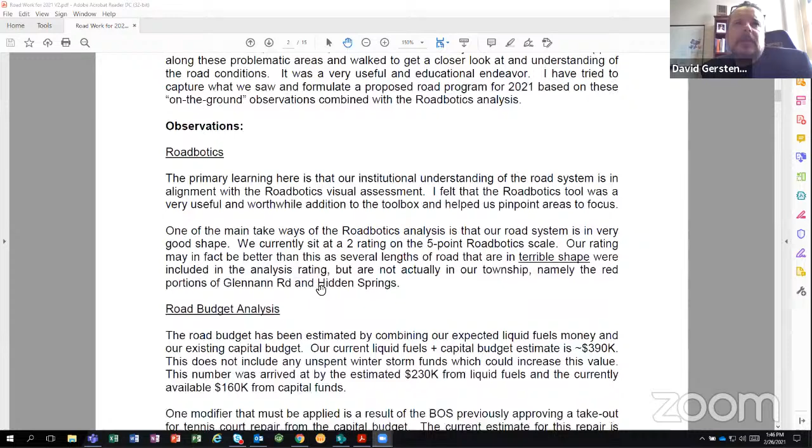I talked about the Roadbotics and the value, and I think Joan and Jeff can agree. We spent a lot of time driving around, taking a look at the roads, and found that Roadbotics was pretty much dead on. There were some problems, like if you did the analysis on a wet day with a lot of leaves on the road, sometimes the computer analysis would equate the wetness or leaves as road cracking, but overall it was pretty good.

As far as the budget goes, our current estimate is we have about $390-ish thousand for the road program. This doesn't include any unspent winter storm funds, and I don't know what that value is yet. And we have about $500,000 or more worth of road projects. So we've got to figure out what we're going to do.

That's just the ones that I've put together with all the conversations I'm having. So you want to put more than you can do on the list so we can figure out what we're going to do next year as well. Kind of what we did with Gypsy Hill.

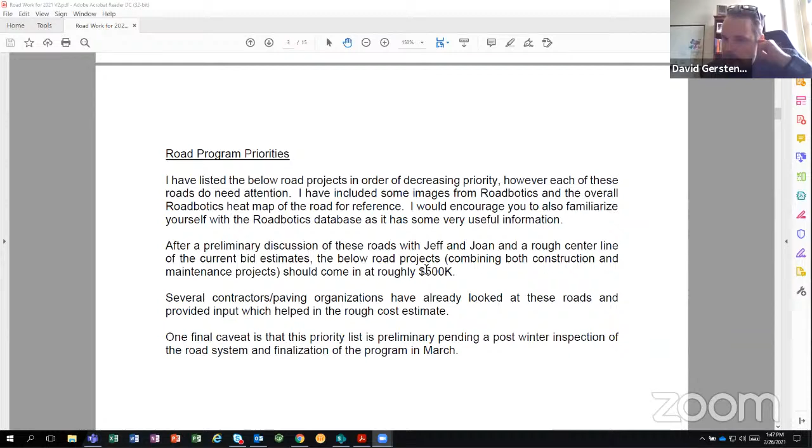Gypsy Hill was something we were planning on doing last year, and it's a holdover, and we're going to do it this year. Another thing to keep in mind, as we go through these roads, I've prioritized them, but if we had the money, we would do all of them this year. These are all roads that need repair, that need attention. So keep in mind that just because we run out of money or can't do that road, it doesn't mean that road didn't need the work.

There are some other parameters. We came up with this loose system of road volume: high volume road, medium volume road, low volume road. I don't have a specific number, but in my mind, a high volume road is a major connector between major roads where we see school buses, roads that we generally travel every day.

Medium volume roads are like Laurel Bridge Road, which we labeled a medium volume road — significant traffic, but not a major thoroughfare. Low volume road, I kind of just defaulted to neighborhoods — not a lot of truck traffic, not a lot of buses, mostly commuters in and out. So whether that's right or wrong, that's kind of how I came up with my list.

So number one on the list is Gypsy Hill Road. I included some pictures here. This on the right is our Roadbotics view of Gypsy Hill — a lot of yellow, pretty solid yellow or red road. Clearly needs some repair. It's a high volume road with a lot of constant traffic going down through it. It connects 896 to 841. So if you live in the township, you know this is a high volume road.

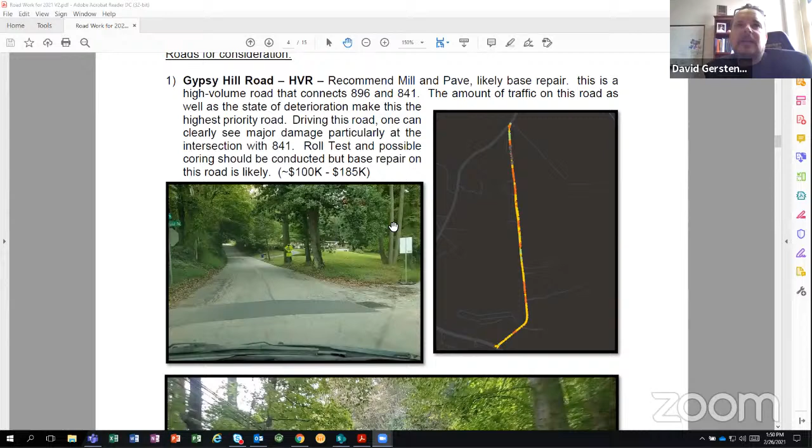So for those of you looking at this picture, this is the dashboard of the car. The road here is 841, and this is where Gypsy Hill and 841 meet. I like this picture because it clearly shows that deterioration right here — a lot of cracking, indentation, cracking, and it's already been patched once. Yeah, this is an area that really needs work.

Similarly here, I like this picture because it also shows that alligator cracking, but with indentations. So it's not just cracking on the surface — you're really starting to see some damage that, I mean, I'm a non-expert, but I would say this is likely a base issue, where you're seeing this kind of road collapse in on itself.

We rated this as a high need road. The amount of dark orange, as a visual indicator, shows that this is a road in serious need of repair.

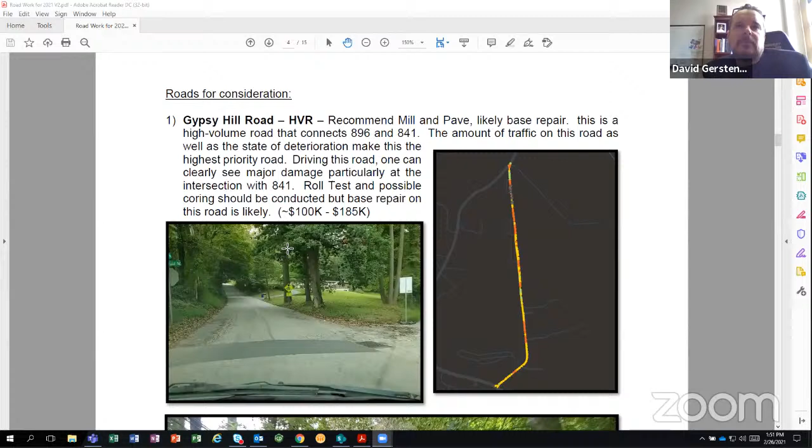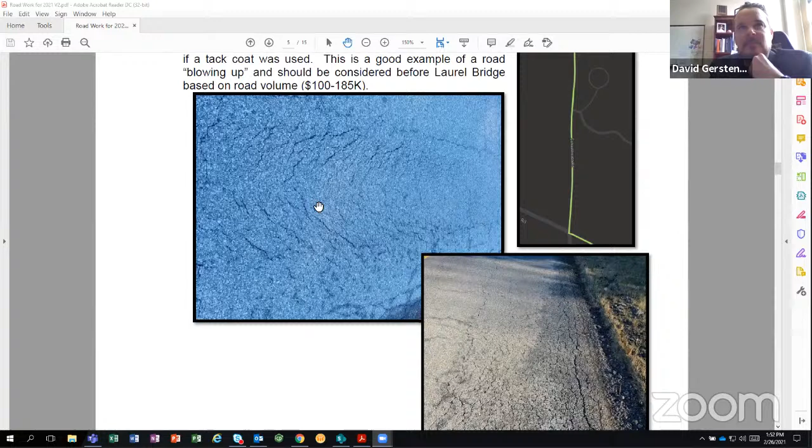This picture shows a strong indentation in the road surface, flat road cracking, indents, and a flat road. A lot of these pictures look like the road is just getting pulled apart. You can see surface cracking along the edge, serious deterioration, likely due to stormwater, and trucks and cars going along the edge, pulling the road apart.

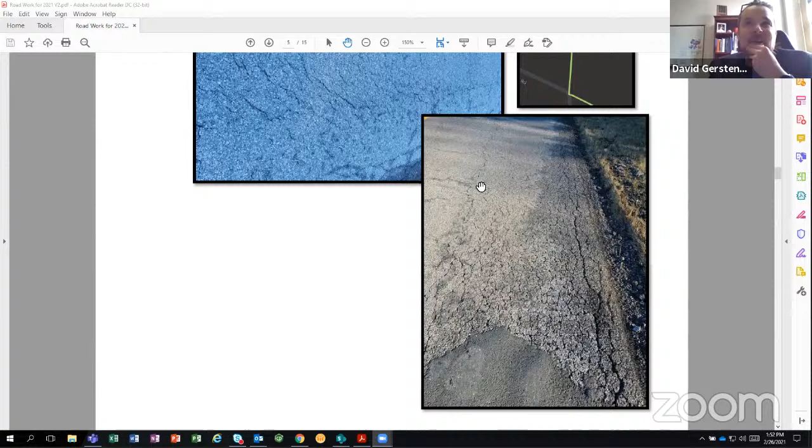So this is something I just put as a 2, simply because Schoolhouse Road, if you want to talk about a high volume road, this is definitely one of them. So I think that would be our 1 and 2.

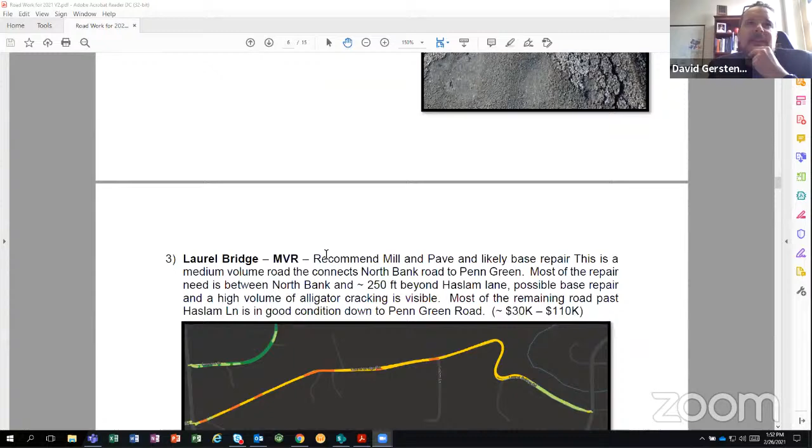Then we have Laurel Bridge, another road. I put this as medium volume. I think it seems like a medium volume. I don't think there's a lot of truck traffic going down Laurel Bridge, and I don't think there's a lot of general traffic on it.

But if I'm wrong, correct me. So this road connects North Bank with Penn Green. We've done this portion of Laurel Bridge recently, so we're not suggesting redoing that. You can see it's actually still in pretty good shape. What we're suggesting is doing this section between North Bank and Haslam Lane.

Here's some photos again of that deterioration. This is right in front of Haslam. Correct. And then this section, where is that section?

Not sure where it is on this map. Clearly one of the orange points, because you can see this road is just falling apart.

So David, can I just ask a question? Because I know this road, I walk this road a lot. I remember looking at it last year, and I don't remember it being that bad. Did this just kind of get worse suddenly, or did I just totally miss this? So Jeff, do you have a sense? Has it always been this bad?

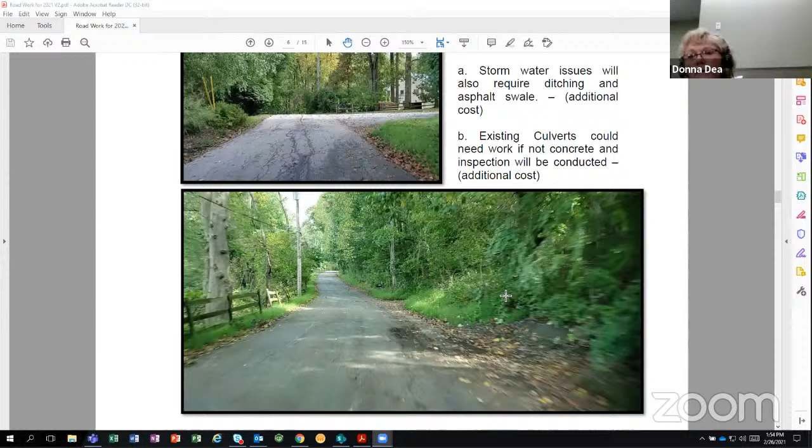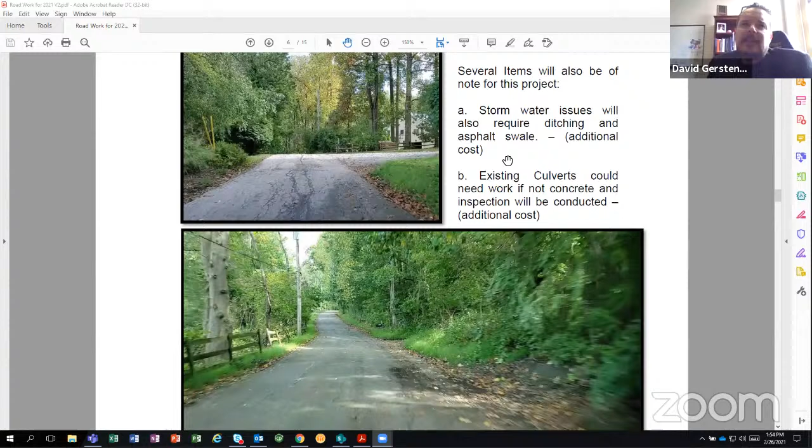There are areas that have been bad, and it's continuing to get worse. I just think it's something we need on our list, wherever it falls. I'm not arguing that, we can decide after our discussion. I knew there was a water issue, maybe the water issue has just made things worse over time. I think we had Laurel Bridge on last year's list as well.

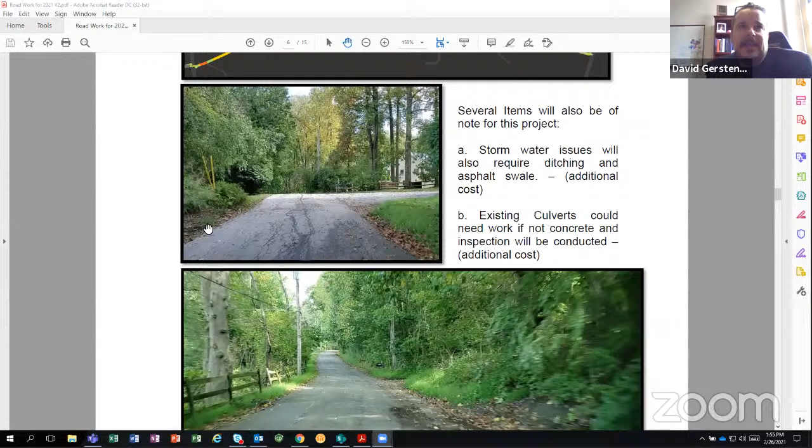And I have kind of 2 points here that Jeff explained to me, that there are some stormwater issues. Ditching needs to be done here, and an asphalt swale. And then there's another issue with culverts.

I think that there's some culverts there that may need to be replaced, Jeff. I'm not sure if that's the case. Well, I've got to stick my head in there and see what they're made of first. I believe they're concrete, but I would like to go through and double check again. So if they're concrete, we're good. If they're not concrete, they need to be replaced. Yeah, if they're metal, we should replace them.

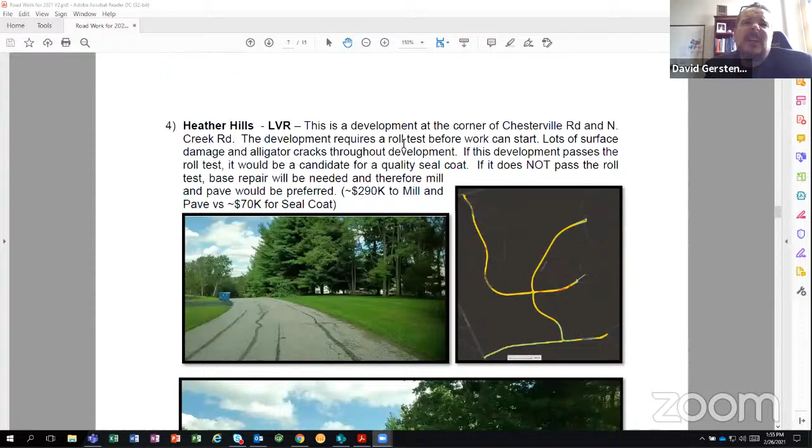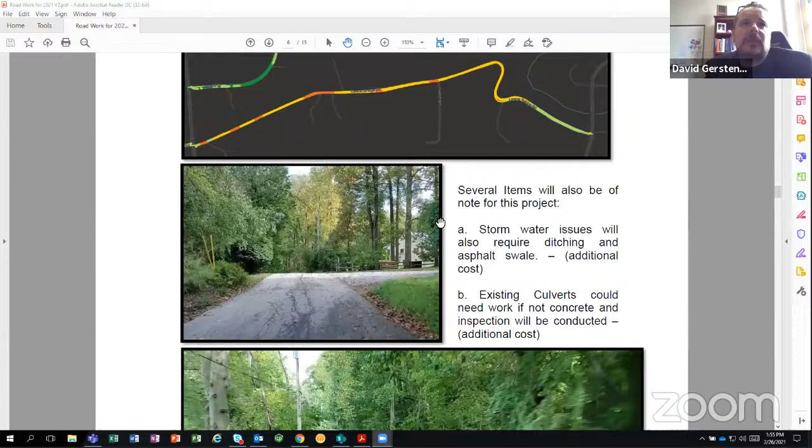Okay, so that would be their third priority. And let's see here, oh, so I didn't put Schoolhouse on here. Schoolhouse should probably be the fourth priority on this list.

Old Schoolhouse, if you remember, I'll scroll up to the top here, is this long yellow road, and it has actually similar problems to Schoolhouse. So Old Schoolhouse and Schoolhouse, not to be too confusing, both have similar problems. They're both in serious need of some attention. But given the volume of Schoolhouse and the volume of road on Gypsy Hill, I put those as 1 and 2.

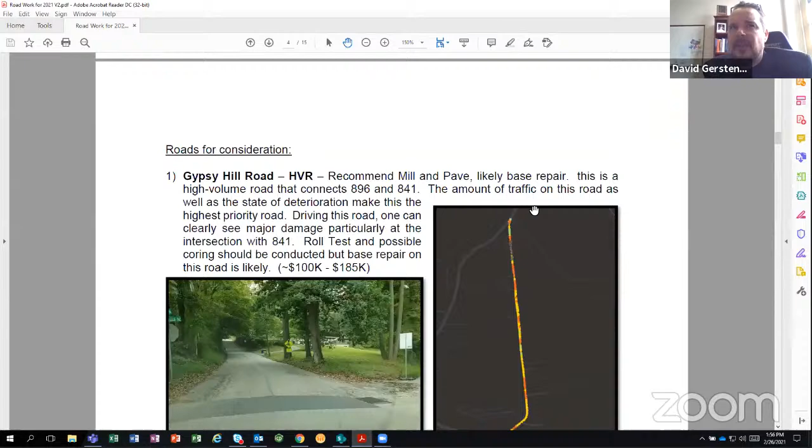And then Laurel Bridge and Old Schoolhouse, I'm not sure how we would prioritize 3 and 4. When we get to the March meeting, I'll make sure Old Schoolhouse is in this, but again it's kind of a toss-up. I think the way I would rank them is 1, severity of damage on the two roads, and then 2, the volume of traffic. If we have a lot of trucks going down Old Schoolhouse Road versus Laurel, we probably would want to do Old Schoolhouse, just because that volume will hasten the deterioration.

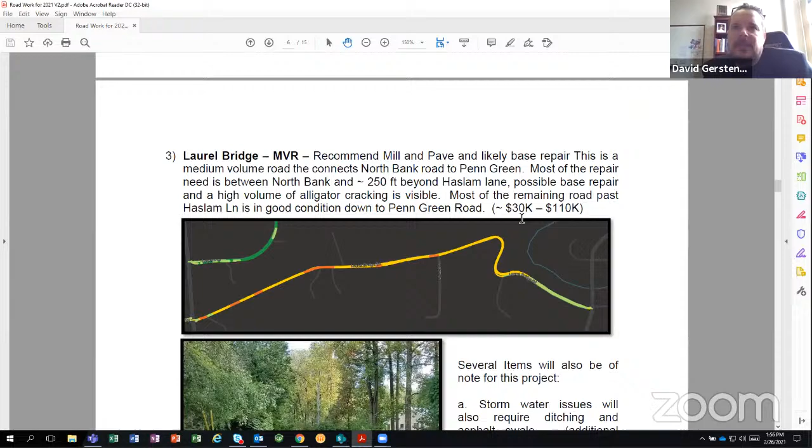Then we have Heather Hills, which was earlier identified as a development. This is a low volume road system. It was at the corner of Chesterville Road and North Creek Road.

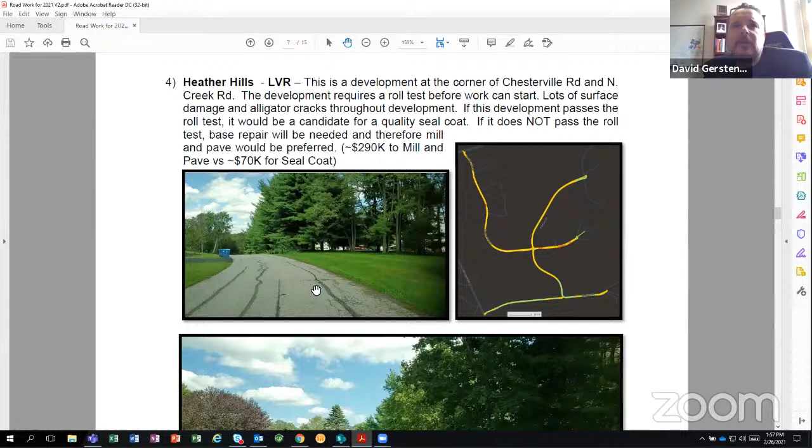Here's the slide. It's a solidly yellow-orange road system, and primarily it's just a lot of surface damage. If you go through the neighborhood, it's lots and lots of surface cracks and surface damage. You can see some extensive alligator cracking in here, with some crack seal in there.

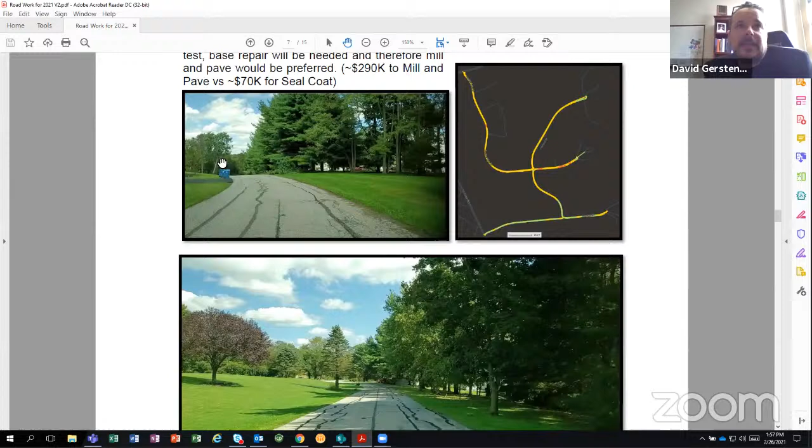One of the suggestions was to actually go through and do a roll test before we do anything, to make sure the base is okay. If the base is okay, one suggestion was to just seal the surface of the road without doing the mill and pave, do a fog seal on the surface of this road.

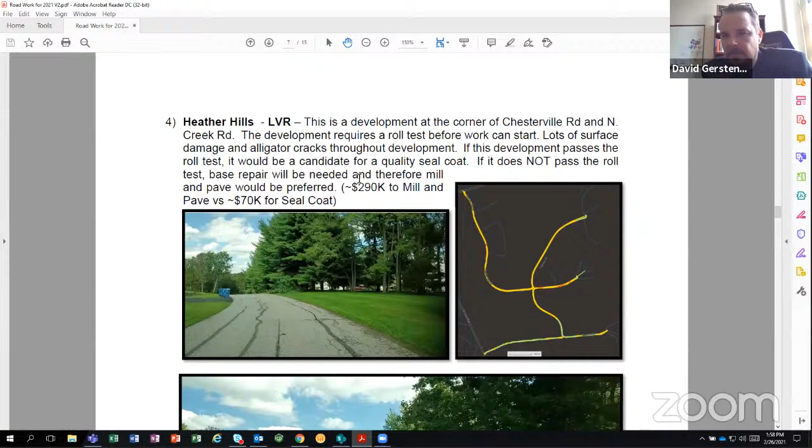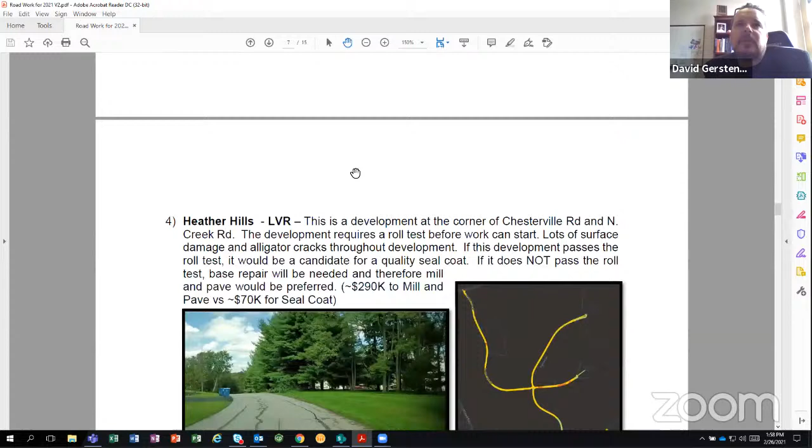Overall, we put this pretty low on the priority list, as it doesn't seem imminent, it's not going to blow up immediately versus the other higher volume roads. So if it was up to me today, I'd say high volume roads are going to take priority versus low volume roads that are in stable condition.

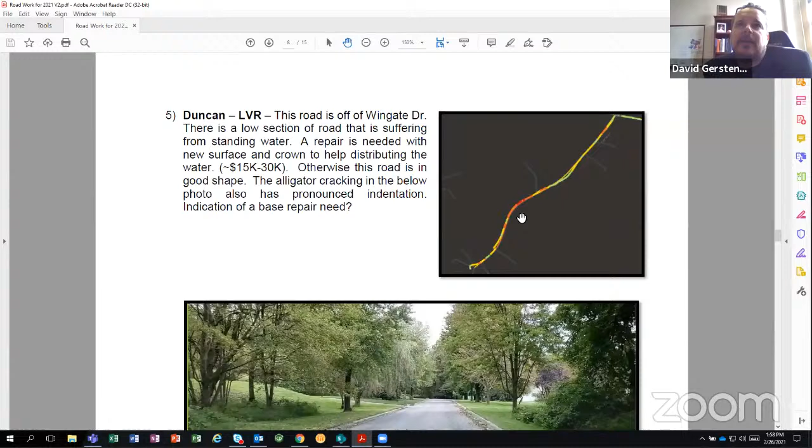Duncan Lane was brought up. We went down this road because of this red elbow here. John, Jeff, and I got out of the truck and walked around, and I don't know if it's as clear in this photo, but there's alligator cracking all the way across this road system.

Let's see if I can make this a little bigger for everybody. There we go. A lot of this is because this is a slight slope and there's a lot of standing water here, and that's deteriorating the road faster than the rest of the development.

If you actually drive down this road, it looks pretty good until you get to this one low-lying segment. So the suggestion here is likely to do a mill and pave, check out the base if there needs to be base repair, but it definitely needs a new crown or some way to get the water out of here. That's basically the culprit. It's not volume of traffic, it's just water accumulating here and causing issues.

I put this in the resurfacing of Crossan Park. This was mentioned as part of the pro organization. It's not a road, it's the entrance to our park, so it wasn't included in our RoadBotics data. I just grabbed a satellite picture off of Google, and you can see it looks like it needs some work. So that's on here as a priority 6.

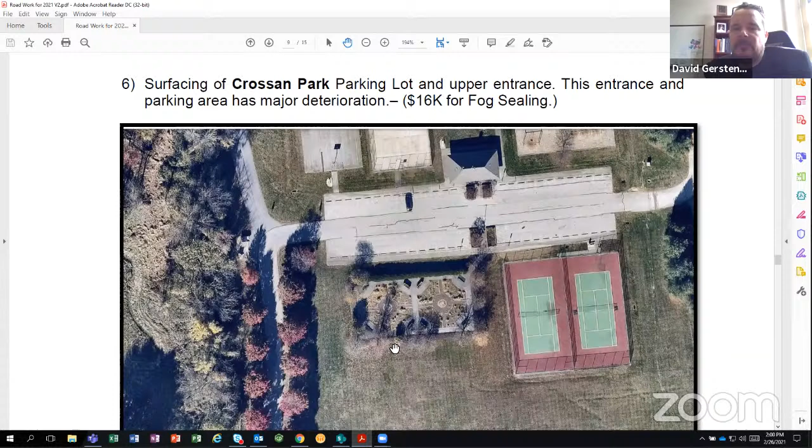This is a pretty inexpensive project relative to the other road projects, as it's a quick resurfacing. But anyway, I don't know if we want to get into this now.

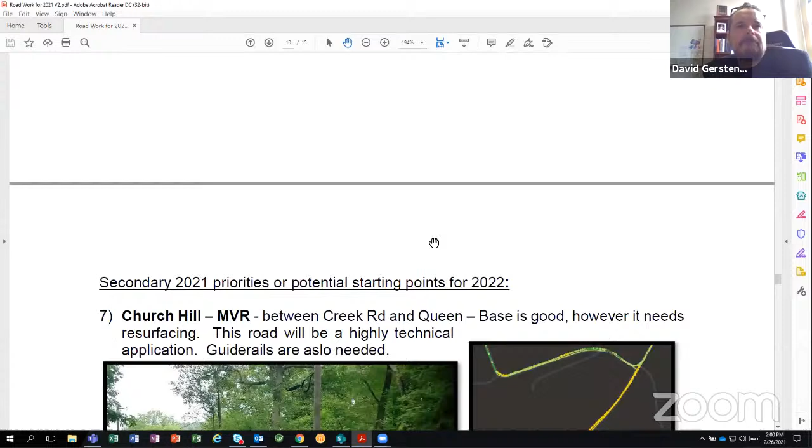Dave said, if we did the entrance road and the top part of the parking lot, if we sealed it, I know at least one of the pavers, Jeff can correct me, said they would do the basketball court for about $800. In other words, they would seal it and repaint the lines and it would look terrific because they're already there with their equipment. So it's something worth thinking about.

Yeah, I think I'd like to hear from them, because that has a number of different moving parts to it. I'd like to hear the pro group's analysis on that, because if they are going to do multiple projects, it might color our decision making.

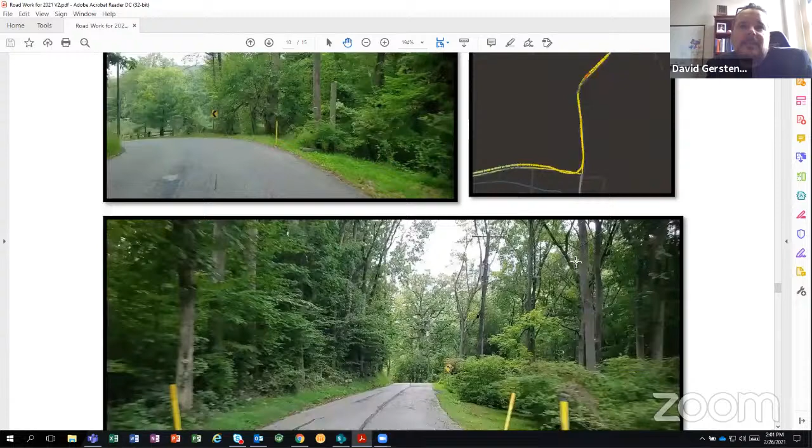I don't know why, I kind of said secondary priorities because I was getting down to 7. So these are things we probably could do in 2022. One is Church Hill, a medium volume road, the section between Creek Road and Queen. The analysis I had was that the base is good, but it definitely needs resurfacing. I can't speak to this, but Jeff mentioned that this road will be a highly technical application. Everything has to go in perfect, and this is a good opportunity to put in some guide rails that are also needed on the road.

So here's the map, you can see the yellow. Dave, can you explain that comment, highly technical? I'm going to need Jeff or Joan to talk about that, he was there. That's about all I got, was that it'll be a technical application.

Because it's going downhill and around a curve and down, the crown and the placement of the asphalt is really going to have to be spot on, so it's correct.

It's a lot more than just doing a straight ahead road. Have we done such a road before? Do we have experience with that? Yes. Okay, and it worked fine.

We were spot on. I think the issue is that it takes more finesse and control of the paver to keep the crown where you want it as you descend downhill steeply and then make a turn. So it's not the same as running along fairly straight, making minor offsets. So it's a strong offset, steep hill, and the crown's the most important thing. You cannot lose control of the crown. Yeah, thank you for that.

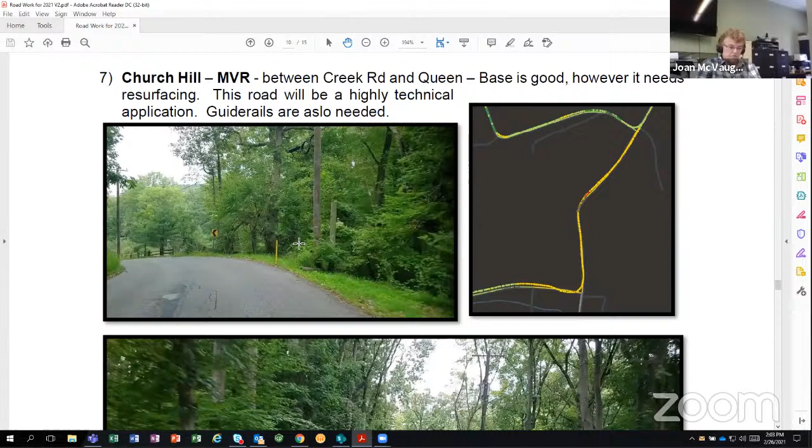Yeah, and I think, because that's my understanding as well, we mentioned we might need some engineering help. We had a similar issue. A much smaller road was where Tilden connects with Walker, and there's a huge stormwater issue there. So when we were ready to address that, we had the engineers draw it all up with all the measurements and the elevations and everything. And we told the paver it had to be exact. They did do a good job, and it's taken care of the stormwater issues. We did that job at a laser level, which you don't always use, but it required a level of precision that we typically don't employ.

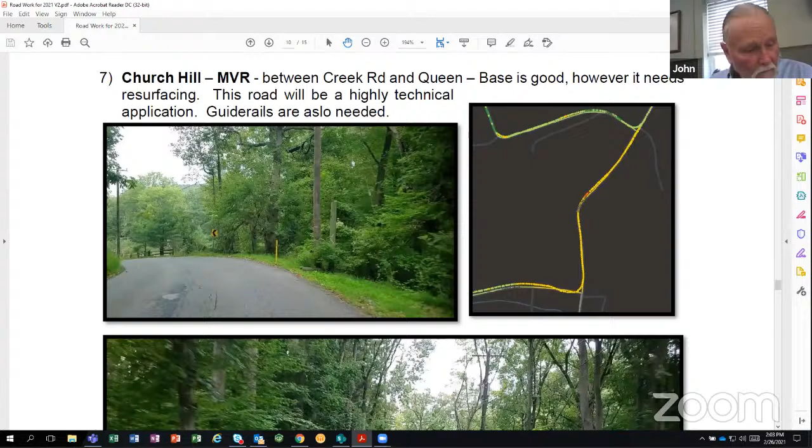David, I do have one comment about Duncan. That one spot that we both looked at, what appears to have happened there is the road is depressed because the rest of the road has a reasonable crown on it. It's got concrete swales on each side, which are all set up to receive the water. But in that one lower area, the road is depressed and the water won't come off the road into the swales. So the question really is, what's going on underneath? We probably need some coring there, and I would think we may need some engineering because there may be moving water under that roadway that's caused that. So I think that one's a candidate for some engineering, and the engineering directing the coring.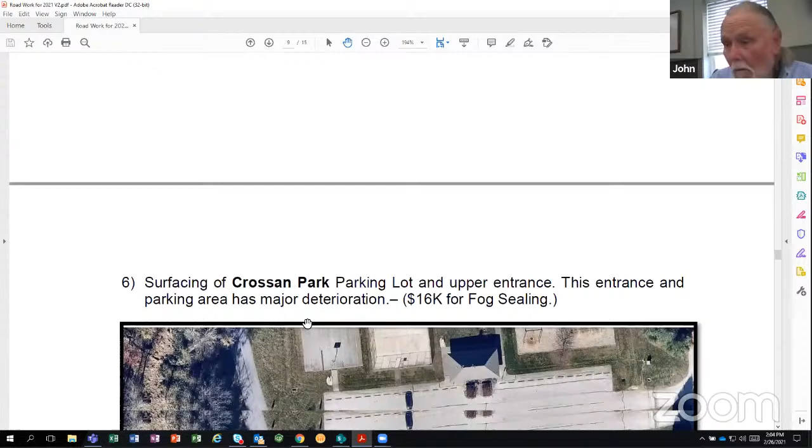Okay. So we got the Church Hill. Yeah, so again, a lot of surface damage, but the road otherwise is in pretty good shape. Hillcrest is another low volume road that was in pretty bad shape.

I wonder, I remember when we drove it, we noticed the extensive cracking, but I wonder if some of this lower score is because of the debris on the road. I don't know if you agree with that or not. It's certainly a possibility with the leaves there as well. But I think it's definitely a candidate for resurfacing. Mostly it looked like it was in pretty good shape with a lot of alligator cracking. That's my takeaway on it.

But we won't know unless we look at the base, right? So we could do some coring. Is that what you would suggest? Or a roll test or something? Yeah, I guess we can talk about the priority setting. I think that because all of this is going to depend on what we want to do this year, because we're now down at 8. But I think we would probably want to look at some coring, but at least the surface doesn't indicate the kind of depressions that we've seen in the previous roads, right? We just see some cracking. The road still looks like it's in good shape. You don't see these depressions.

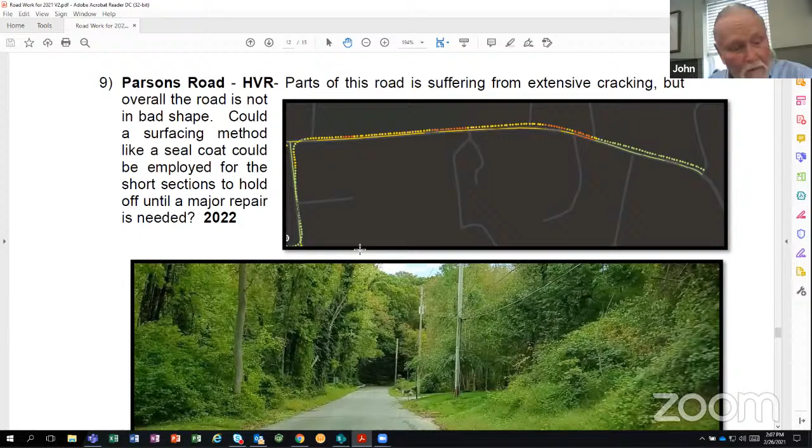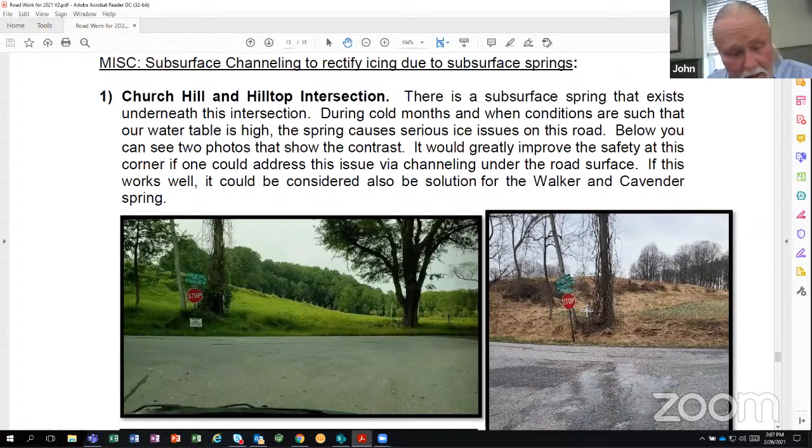I think the only other thing I would add is that this is based on the information we have from Roadbotics. Certainly Jeff and Jim DeRazio drive around the township all year long, and they look at roads differently than we do. We sort of drive around looking at other things, but they've got a pretty good sense of what's going on. But the one thing that really puts the final information that helps us make a decision is the physical field inspection done sometime in mid-March, maybe the third week of March, when the roads dry out, all the snow melts, and the damage that may have occurred during the winter is revealed. It also validates what we have right now, but it could add scope or indicate more severe damage.

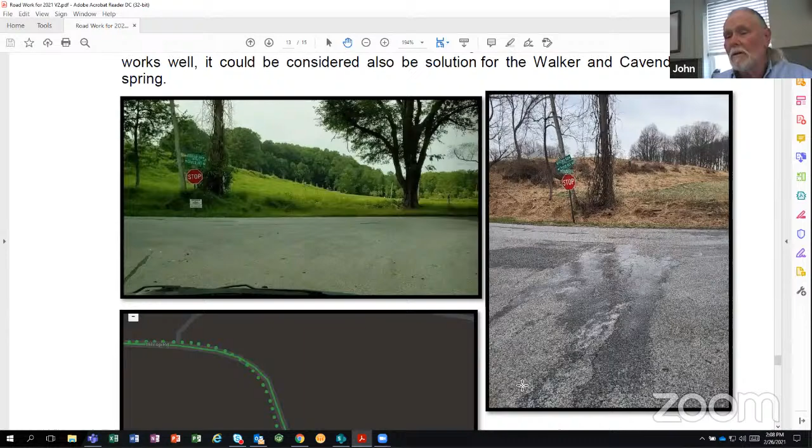So yeah, the key item here is I think what we have is a really good evaluation of where we are based on the information we have. But the final decision needs to be made after we go out and do that thorough physical field examination.

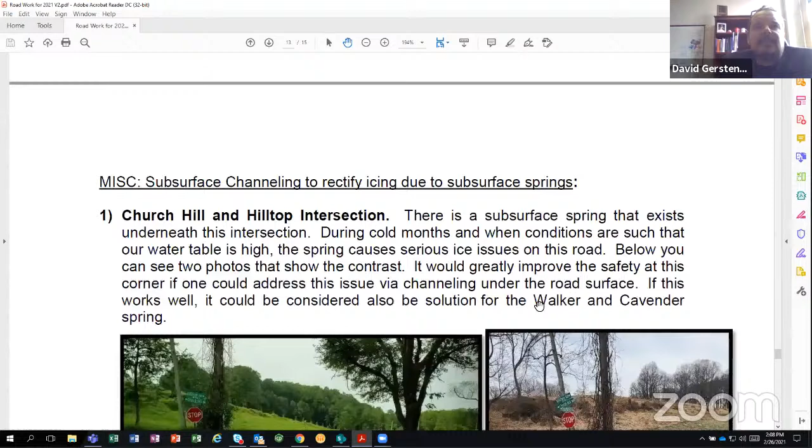The last thing is kind of interesting, these are the kinds of problems that a township faces sometimes that pop up. What we have here, there's a couple of intersections where we have subsurface springs. When the water table gets really high, it pushes up through the asphalt. We have one such spring at Church Hill and Hilltop, and then another one at Walker and Cavender.

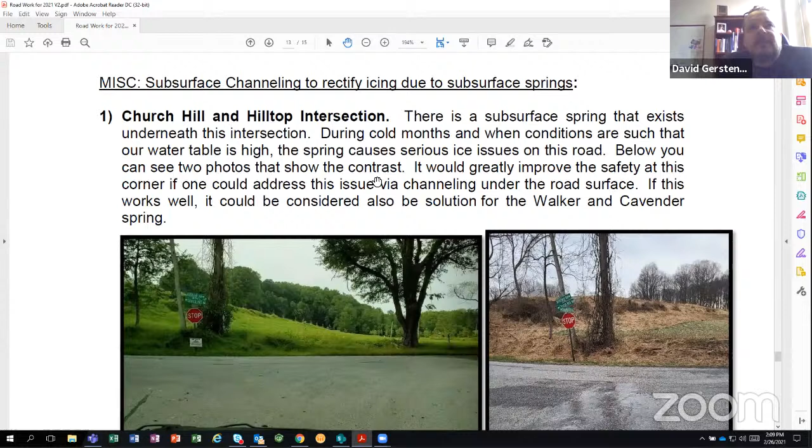A resident recently mentioned the Church Hill and Hilltop section because it creates a sheet of ice pushing up through the intersection. And I bring this up because, again, there's a priority setting. Right now we're focusing on icing it down. So when the water table's low, the intersection looks like this picture here, a very good intersection, everything's in good shape. And then when the water table gets high, it starts to seep out and creates a pretty dangerous situation with this ice sheet. And it's at the bottom of a hill, not great sight lines around this corner.

And so we wanted to just take a look at it, I wanted to learn about it. So we went out and took some pictures with Jeff. And now we're dealing with this with salt. But when we get an opportunity, it would be nice to think about engineering solutions.

Very briefly, as I tried to educate myself on this stuff, there are engineering methods like subsurface channeling or whatnot that push the water, allow the water to channel away from the surface of the road, off to the sides. The viability I'm not sure, but one of the things you have to consider is that this is a road that's in good shape. So we'd have to have a pretty good engineering solution if we're going to tear up an otherwise good intersection and then not have it fix the problem.

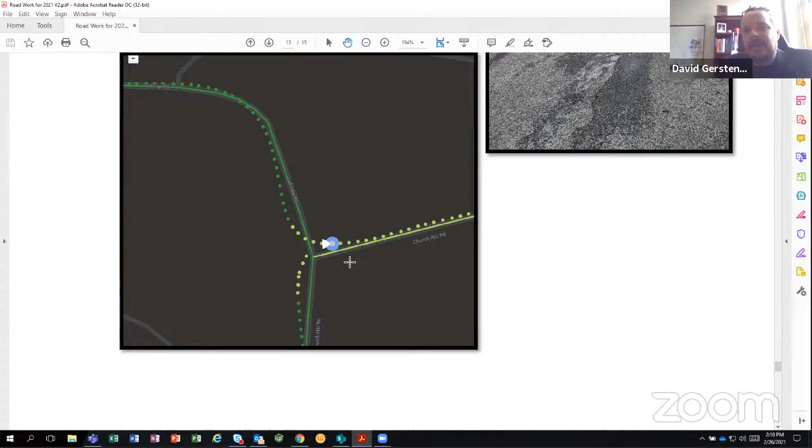So it would be maybe an engineering evaluation here to solve this. David, I think that's exactly right. Both of these situations require an engineering overview, possibly with some coring directed by the engineer to define what the situation is. You may have to put some under drains or something in there. So that's beyond Jeff and Jim and any of us to define something like that, that's where engineering comes in. I don't like overusing the word engineering, but that's an example of where we do need it.

On Church Hill and Hilltop, even though it's only an issue when the water table goes up and we have ice, it can't be good what's going on underneath the surface in that area. It could be screwing up the whole road, even though we don't see it.

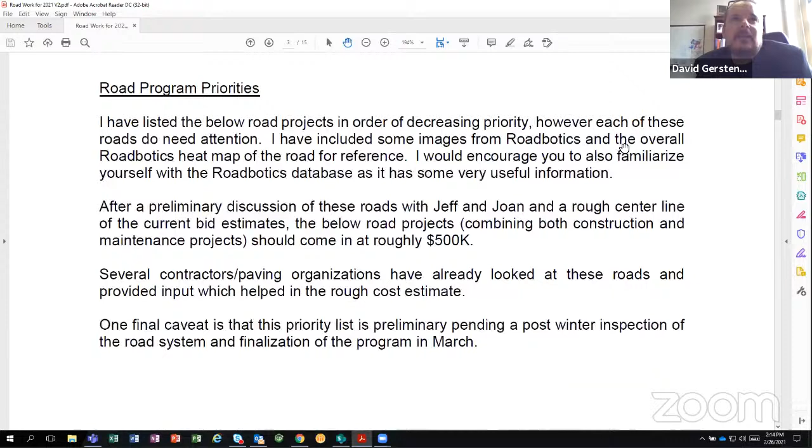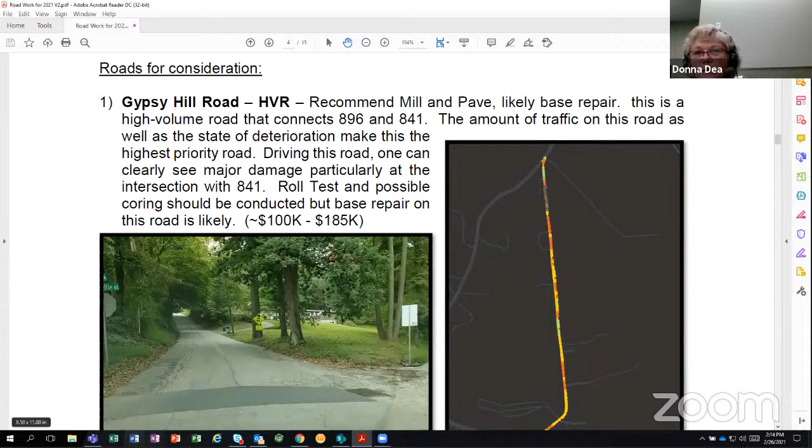Well, David, one comment, just before we leave today, not saying that we're ready to leave, I would like to create a list of additional information we need for the next meeting to actually come to a prioritization list, because I think you've laid out a scope and we all know we can't do it all. But there may be some additional information like an engineering assessment, coring, whatever. If we could go back before the end of the meeting and just make a list for Jeff to say, this is what we need.

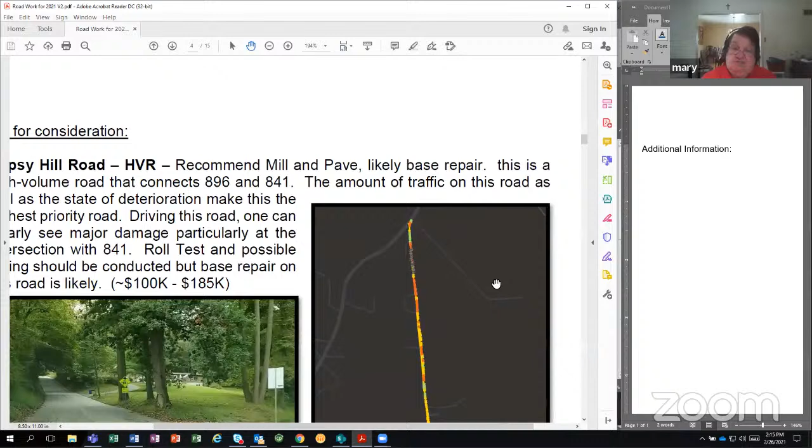We can do it now if you want to, but I just want to make sure we don't come to the next meeting and we haven't really gathered the information we need to make a decision. Is that okay? Yeah, no, that's fine. I can just make some notes as we go through, if you want to go through just at a high level each road. I think too, Dave, like the first one, Gypsy Hill, we seem to all be in agreement. We need to do something there, but are we going to do 100 or 185? Yikes. We have to nail those costs down a little bit too for the next meeting, right?

Well, yeah, so that was basically the range of bid estimates that we got. Okay. And so I don't know if we can actually get a firm number until we decide to do the road, because, again, I don't know the process, so Joan, jump in. But if we decided to do all three roads, Gypsy Hill and Schoolhouse and Old Schoolhouse, my assumption is we would put all 3 of those roads in one package and say, this is the road projects for 2021. And then we would get bids from everybody who wants to bid on those roads.

This is one of the things I did want to talk about. Earlier this morning, I sent everyone an email with a copy of a bid summary from McCormick Taylor, who were our engineers in 2010. And that year, we had created what we said was a base bid, picking out certain roads that we knew we wanted to repair. And then we had 5 add alternates that they had to bid on. And then we could do the base bid and choose any of the other 5 if we had the funds to proceed with those.

So that's something we might want to consider when we're laying these roads out and we're going to put them out to bid, that we say, for example, Gypsy Hill and Schoolhouse, we know we want to do those, and then come up with some add alternates that they can give us a price on. And if it fits in our budget, then we can move ahead with those.

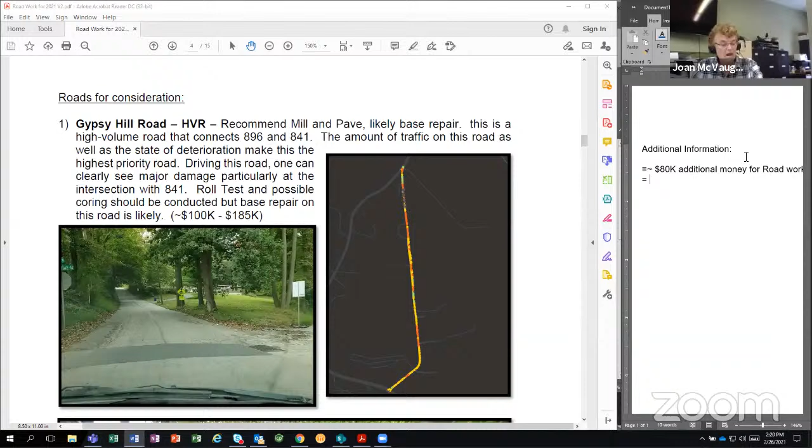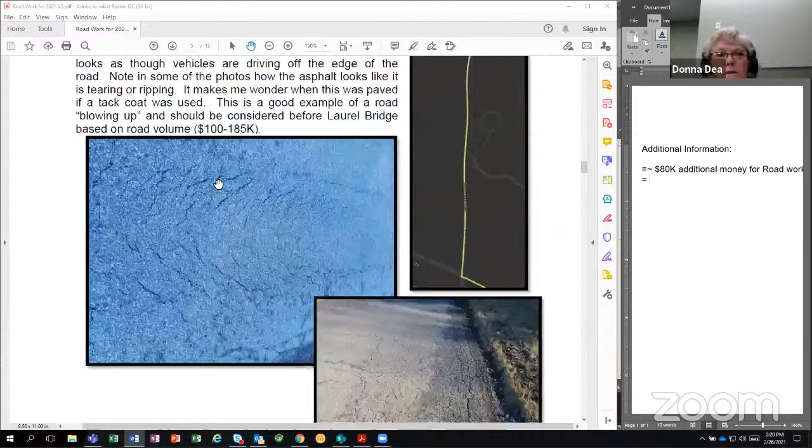Right? So I think Gypsy, I think we're likely going to do. And then Schoolhouse. Okay, so just take it one at a time, David. Do we need any more information for Gypsy? Is there anything, does anybody else need any more evidence or roll tests? I'm fine.

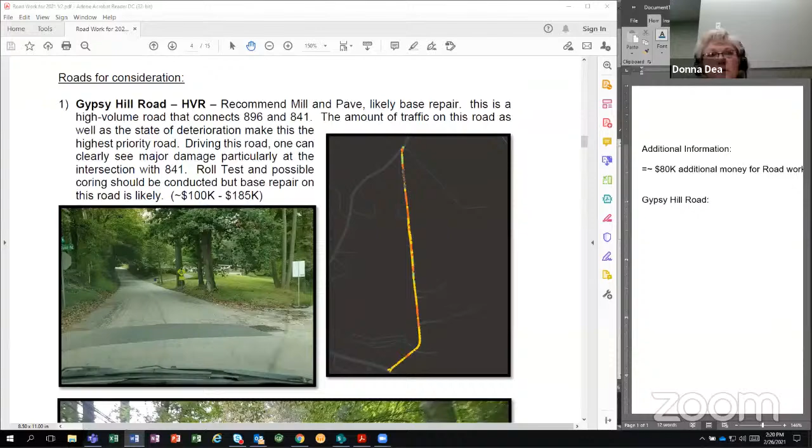It needs to be done. We talked about how the final inspection could possibly trump anything we do. Right, but if we just go through these one at a time. Now, the layout that David's got is pretty good. Okay, so Gypsy, we don't need anything else. So how about the next road? So I think it should be on the list.

So Schoolhouse Road, do we need any additional analysis of that? Are we all in agreement? That looks like a road that needs to be done. Yeah, we just have to find out what to do about the water gushing down the road. I don't know what that'll involve. So that's engineering? That's part of the reconstruction process.

If you just pave the roads and ignore the root causes, you don't have to do anything about the drainage, but the drainage is probably the most important element. Sure, or it's going to come right back again. That's exactly right. Now, there is one issue on that roadway. Hey, John, you're on mute.

Okay. Yeah, there is one issue on that roadway. We did a fairly big patch on that thing a while back. I didn't look at it yet, but I assume the patch is in decent shape. But it's just a key learning about how uneconomical patching a road is, because the cost of a patch per square foot is higher than anything else we do. So that patch becomes higher quality than the rest of the road, and a few years later, you have to grind up the patch.

So if you're going to patch a section of road, you ought to go all the way across the road, not just do something down one side. Just a point of interest. And John, if you patch all the way across the road, do you still have to tear it up when you repair it, or can the patch stay? Well, you have to tear it up to the extent that the patch requires, but the idea is to go all the way across so that later, when you come back to pave the road, you don't need to grind the patch up because it's full width.

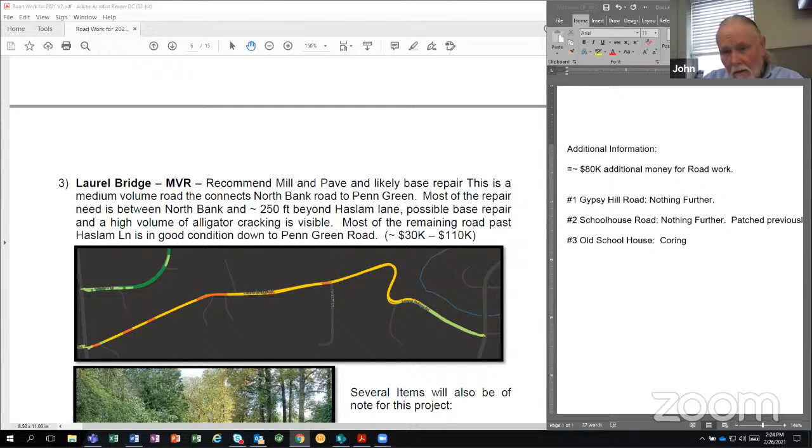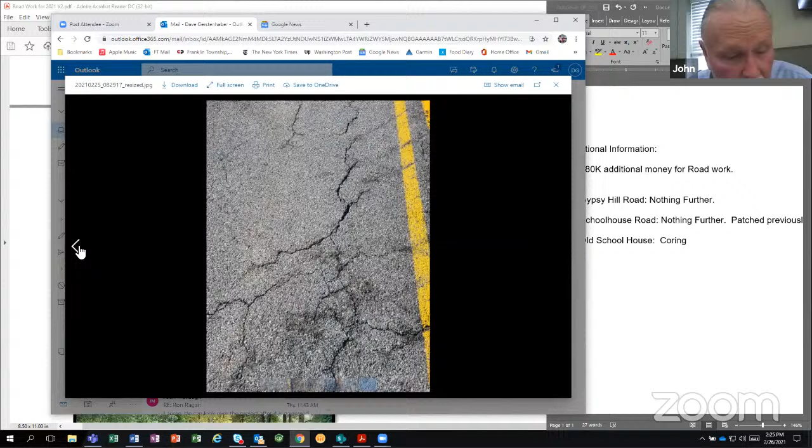So they're very similar pictures. A road that's deteriorating. This was hot off the presses, so I didn't get to put it into the report. But yeah, so we're gonna add this as a 3. I don't know, but we'll have to get this. But my feeling is this is probably a higher volume road than Laurel Bridge. Yes. Right there is a good example of...

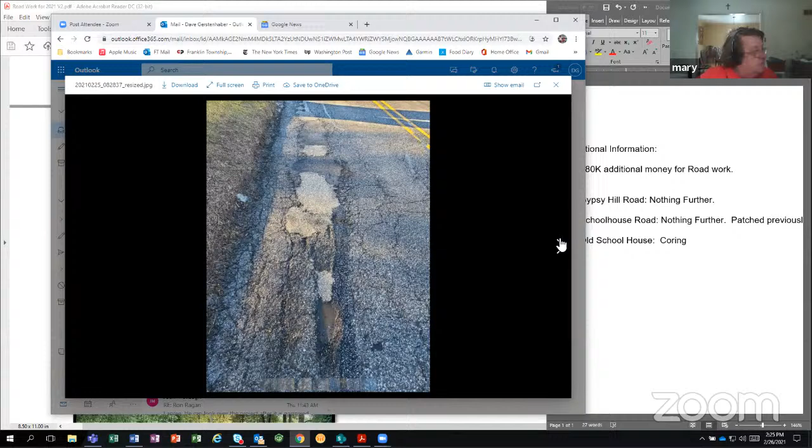Well, is it a higher volume since they put the bumps in and people don't use it like they used to? Years ago, I used it when my kids were going to school, but not many cars go over it now because you have to stop and stop and stop. So Laurel Bridge, they just stay on 841, right? Yeah, Laurel Bridge, they don't use. I don't think many people use Laurel Bridge because even though we've done some work, there's still some hairpin turns. And if you had to compare the two, they're going Old Schoolhouse.

Okay. And so Jeff, was it Old Schoolhouse or was it Schoolhouse that widening was suggested? I think we need to look at Schoolhouse for possible widening. I didn't have my wheel with me at the time, but the amount of people that seem to go off on the edge of the road just seemed to be high. Okay, you may want to add that to the list then.

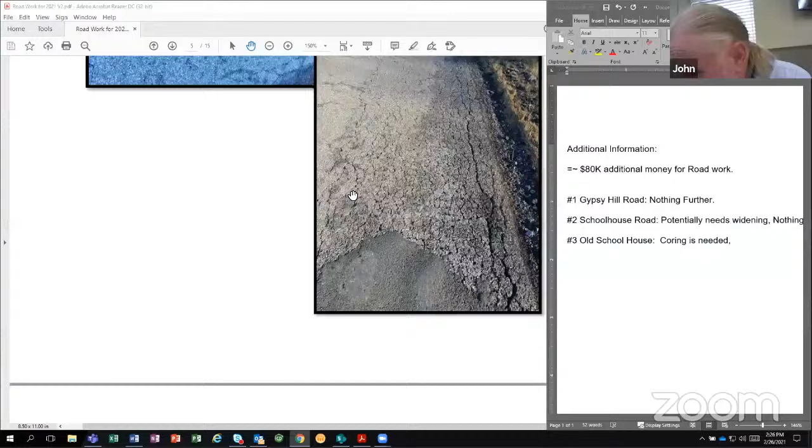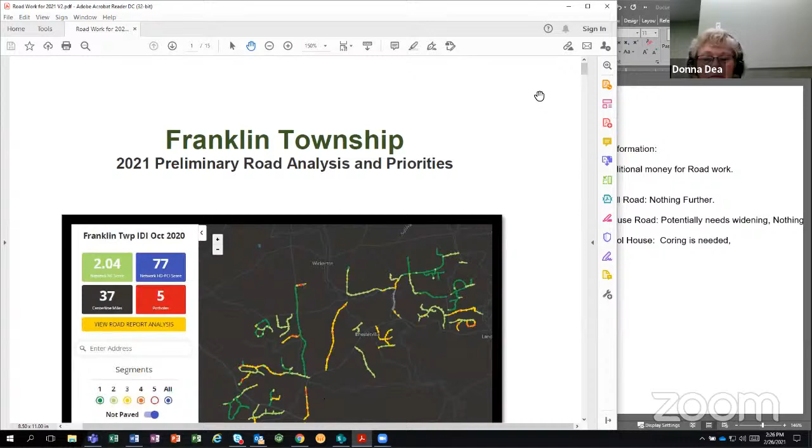Yeah, Old Schoolhouse Road has got some very narrow sections on it. It's got probably just about everything wrong with it that you could possibly imagine in a rural road because of the blind corners. It's got a blind approach to a stop sign there at the top of the hill. And so it's not a really good road. So certainly it needs repaving. But the last time we paved it, it just became a speedway.

All right. With Laurel Bridge, which is the next one, I think we talked about, we need to look at the culverts and see if they need to be replaced. I think that's just some information we need to capture. Check out the stormwater issue, right? And the stormwater issue too, yeah. And that doesn't mean we're going to do it. Like I said, this is just information gathering, okay?

We're ahead of the game for next year, Donna. Well, information's always good. I think we've always done that. We've always come up with a scope of work that significantly went beyond our potential budget. So there was always a significant look ahead.

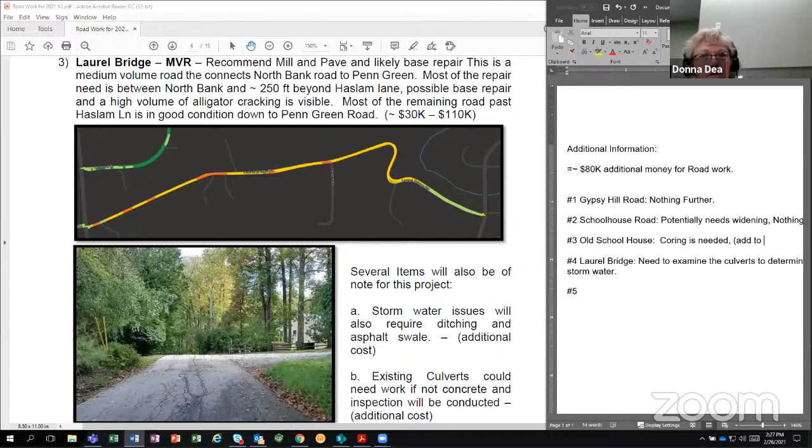Okay, so is Duncan next? Which one's the next one? Dave? I think Duncan's next. Oh, Heather Hills, you're right. So this one, we need to do the roll test. Right. In addition to the roll test, you need to survey the crown on that thing very carefully to be sure that the crowns are appropriate. Because if you do an oil and chip on that road, you cannot change the crown by adding such a thin coating. Crowning there and drainage would be extremely important besides the roll test. Yeah, survey crown and drainage.

And didn't Ron Ragan suggest when we get a couple days of rain this weekend, go out there and look at it and see if there's puddles and where it's draining, where it's not draining, and then down the road do the roll tests. That is, if you want to see what's going wrong and find your bad spots, drive around when it's raining.

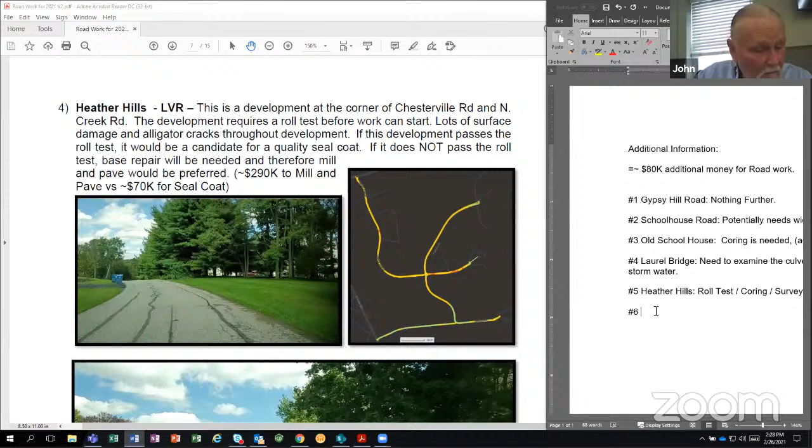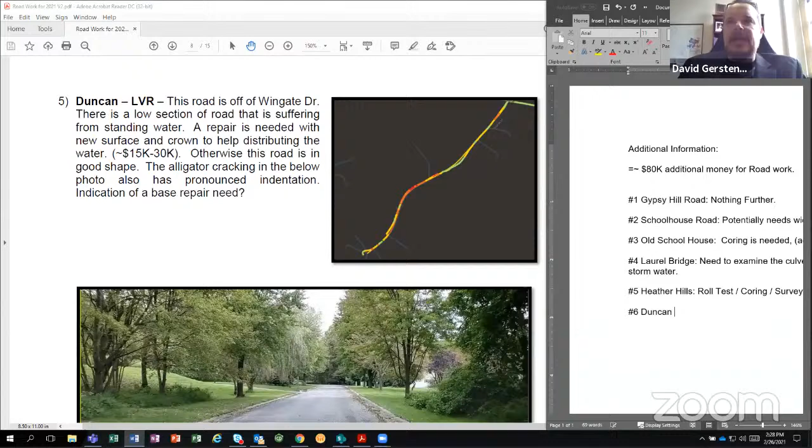All right, so Duncan Lane's next. I'm just going to keep you guys moving. Yeah, thank you. All right, Duncan Lane. So Duncan Lane is likely going to be a patch because we're not doing the whole road. We're just going to be doing this little section here. So we need a core, right?

And anything else? Crown? That could be a major base repair. You might end up digging that whole road out and looking at the subsoil. Be careful. Be sure that it's suitable.

So you want some cores? Is that what you're saying? Oh, absolutely. Because there's possibly water running under the road and you may have to put some under drains in it. You'll end up probably exposing that to dirt, considering the amount of depression that's occurred there.

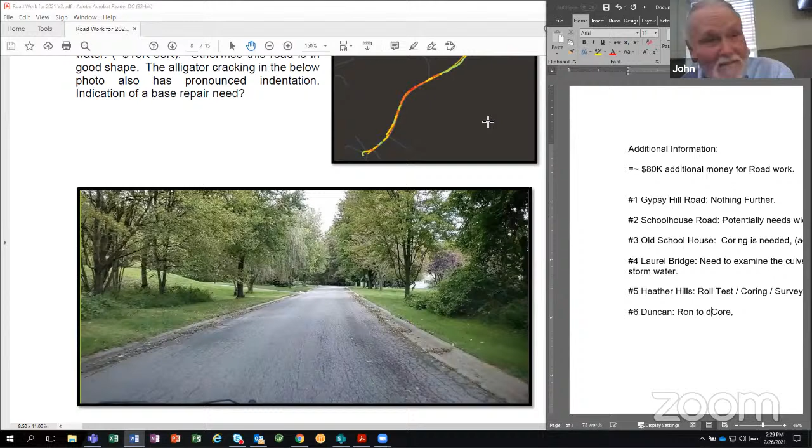All right, so what should we call it? Is core, do we need a core? Well, it'll be to start with, but I think before you core, you want to get Ron to direct the cores because it's an engineered solution. And if he's going to engineer it, then he ought to pick the spots. That makes sense. That's a good idea, John. Okay, Ron to direct coring.

Yeah, same thing with the one over there on Hilltop. I wouldn't willy-nilly go out there and core that thing without his specific direction. Yeah.

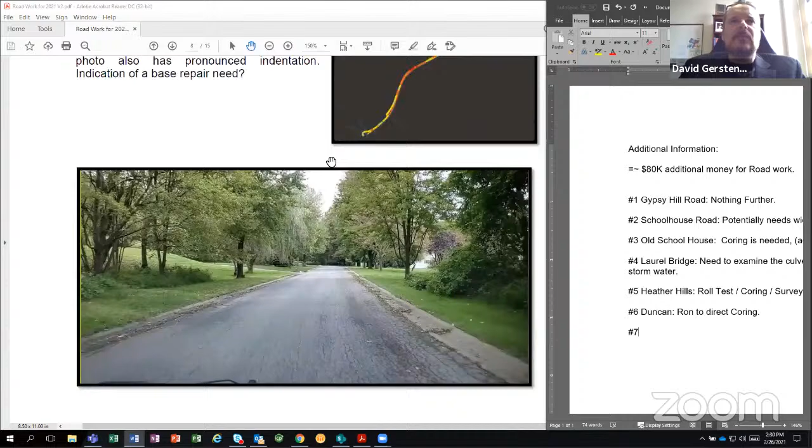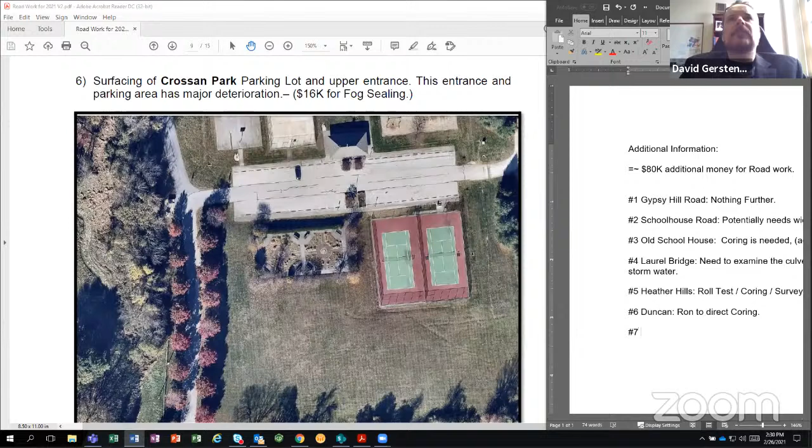Okay, so then we just go into this Crossan Park piece. I think there was some question about whether we can roll in resurfacing the basketball courts and all that. So if we're going to do anything, we'll probably just wait to see if that pro group has an idea of what else we could do while we're out there, if we're going to do something there.

So let's see. I think overall you need to prioritize your main roads. When you look at it all in its entirety, and you start to prioritize, the main roads have to go first. Yeah, I mean, I think that comes out naturally with this priority list here. Yep, I think if you're there.

Yeah, but okay, I hate to be the contrary one, but if this is 16K-ish, right? If we can do this, get the basketball court up to snuff. I mean, once again, it all depends on how much money we have. We got to do the ones we talked about, Gypsy Hill and Schoolhouse, and Old Schoolhouse. I mean, if we could squeeze 16K out of somewhere. Yeah. Well, yeah, I agree.

And I think, when you think about order of magnitude, projects 1 through 6, we're talking about tens of thousands of dollars. I mean, these are hundreds of thousands of dollars in these top 3, and probably tens of thousands of dollars here. If we can get something that's relatively inexpensive done at Crossan, then I'm not sure if it's really a road project, but we put it in here because the pro committee did ask us to look at it in our road program project, and I agree with you, Donna.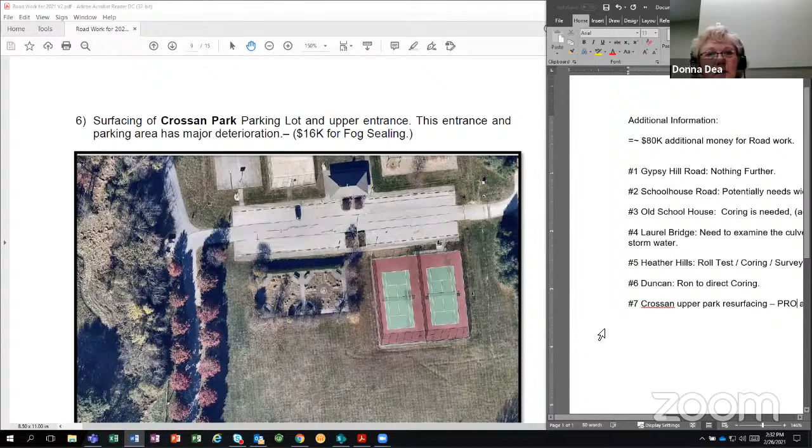I have a question to ask, and this I could be off the wall, but I know we've had previous conversations about the sealing and our concerns. I know, John, you've expressed concerns about sealing. Could this be a good test case? Because even if it doesn't work the way we think it's going to work, we get it here and it wouldn't be in a person's residence. Is that, or am I in the wrong? Am I mixing things up?

No, I think you're probably right there. That this would be a good opportunity to try one of these high quality fog seal methods. Because I don't think there's any base repair needed. This is just a resurfacing. And so, yeah, this would be something that I have up here as fog sealing, 16K for fog sealing.

John, do you have a thought? I don't know. Would you feel like, could this be a test case for you? Would this make you feel better if the fog sealing performed a certain way? There could be a disadvantage here using those, because typically what that depends on, the oil and chip coating, is the traffic kind of squeezes it down over time and smooths it out. And you don't get any volume of traffic in there.

So it could end up staying very rough for a really long time. Where if you put it on a roadway, the vehicles smooth it out over a year or so, but you would never get that kind of smoothing effect in that parking lot. So it could stay rough for a long time.

I think from my understanding is they actually just do some heavy rolling on that surface, because it's not like there's a lot of exposed rock, I think, when they do this fog seal. So they lay this surface down and then they do some heavy rolling over it to kind of compact everything in to address that issue.

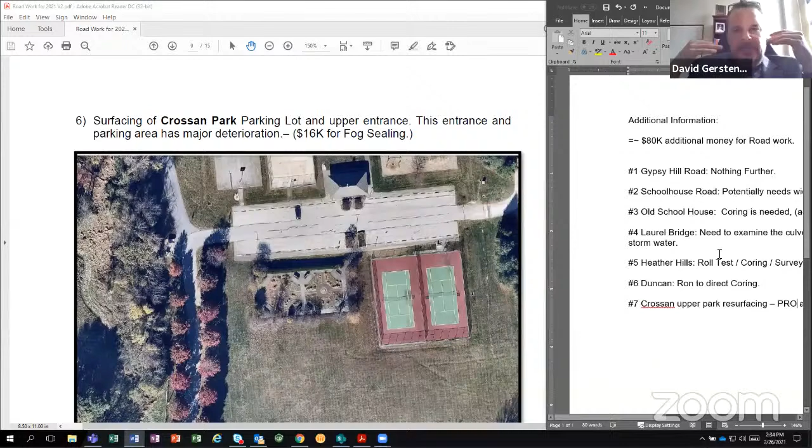Yeah, we're not done. This is, again, just two major items that are out there that will affect what you do in the end. We're not making any decisions today. We're just, here's the stuff, here's everything. We're just getting the information together, just trying to put it in perspective.

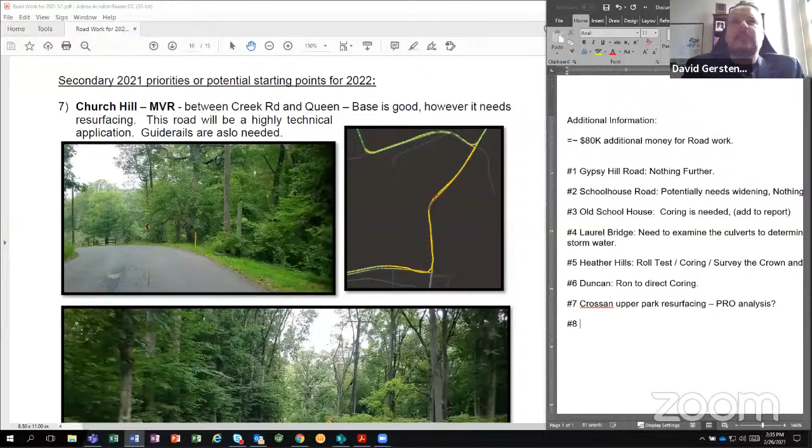And then with Church Hill, well, we said an engineering review, right? Is this the one that needs the engineering? Oh no, that's the Hilltop, that's the intersection. I may be in the wrong spot here. No, I think we wanted to have an engineer take a look at this. I mean, we don't have to do it again, this is not necessarily something we need to do this year, but that's a...

We need some help there because of the stormwater that comes through. Right, right, okay, that's what it was.

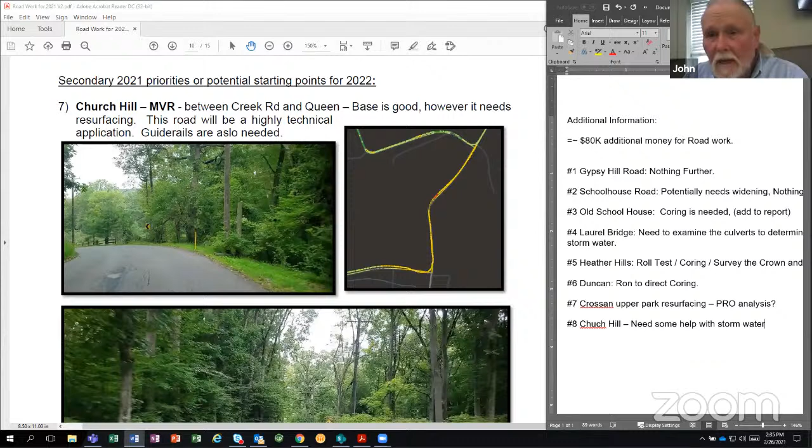All right, at some point I want to talk about RoadBotics and prioritization of the roads based on their evaluation. There's some detail, but whenever we get to that point, probably about 15 minutes or so. Yeah, we're almost done, we're almost done.

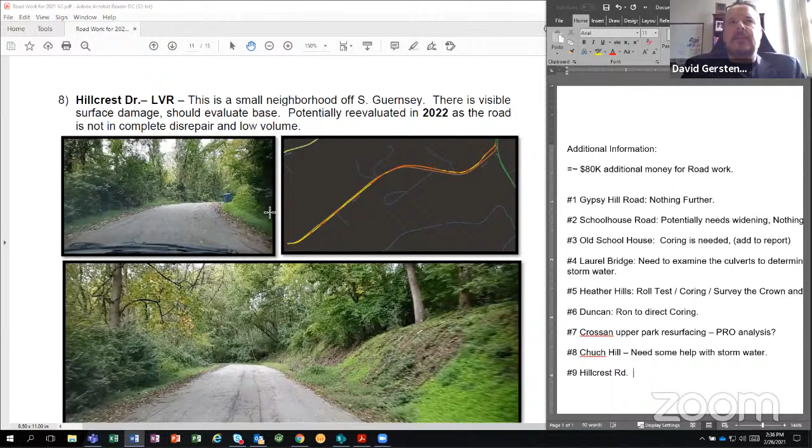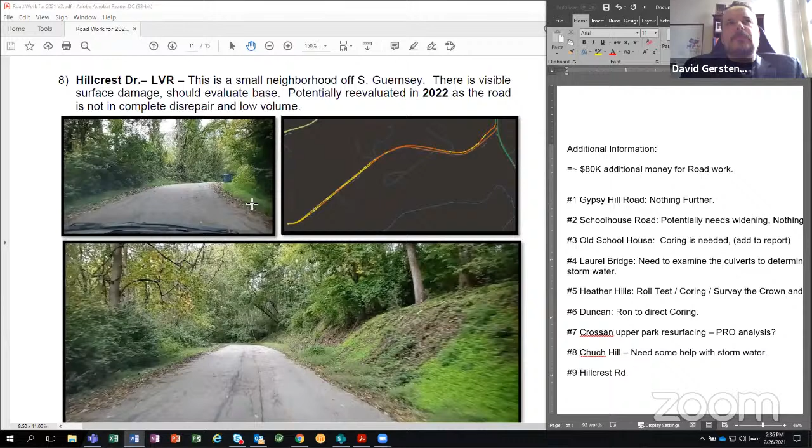So, with Hillcrest, I guess we wanted potential coring. I mean, again, we don't have to do all this coring this year. Hillcrest was on here as something we should consider next year, as was Church Hill. So my point here is we're getting down in the list where we're going to be out of money by point three, whatever. No, there's no point coring when we're going to have to do it again anyways. Yeah, based on that, we're probably done. These are just for scope.

And then finally, I don't know if we can do anything this year about these intersections. I just would like to educate ourselves on what the options are for this intersection. Well, there's no downside to coring it. It's fairly inexpensive because Yardworks has their own coring machine, so we don't need a contract to go out and do it. We can get it on their unit price basis.

So if you take a coring and you don't use the information that year, it doesn't mean you lose it, you still have that core. But could it get worse? I don't know, but I think if these areas we're talking about, where we have water running under there, that core will tell you pretty much what you have there. I don't think you lose it, but...

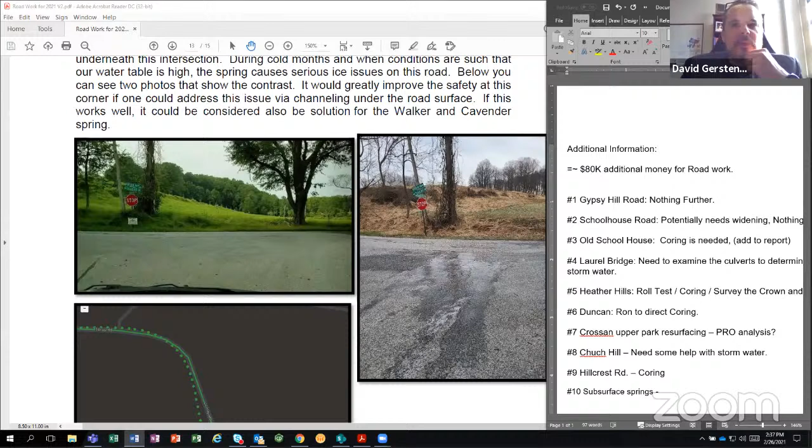That's really something we need to decide when we're going to do those cores. All right, I don't think you lose all that. Last bullet point I'm going to talk about is the subsurface springs in general. I don't know if we need to act on it this year. I'd like to get some indication of what options there are. I'm not really sure how to do that. I'm not sure who we would contact to come up with potential alternatives or remedies, because I don't want to tear these intersections up and then put in a solution that doesn't work, tear up a good intersection.

Well, I think you could get Ron to go out there and give you an evaluation based on a few cores. That wouldn't be a large investment to do that. Then you'd have that information in your pocket going ahead next year. Right now you just don't know, but that would definitely put a frame around what's underneath there. And this one really concerns me.

You never know what's going to happen in the winter, but if we could get a sense of Church Hill and Hilltop, in case something blows up next year in the winter, and we've looked at it beforehand, I think it would be worthwhile just to have a look at Church Hill and Hilltop.

Yeah, I agree. That's a lot of water coming out of that. Dangerous too. Yeah, it is dangerous.

All right guys, I'm sorry but I'm going to have to get off this meeting. Oh, this has been such a good meeting, I can't last any longer. I'll look at the end of the meeting on YouTube. Okay, thanks Mary. Hope you feel better.

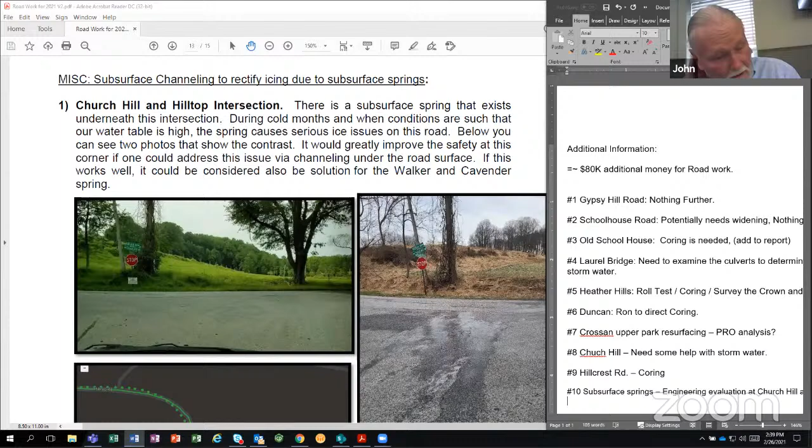Okay, thank you. All right David, I want to talk a little bit about RoadBotics and what a useful program that's turned out to be. I was definitely skeptical when we first started, but the color coding is interesting on the map, but there's a whole lot more to just the color, because within each color there's a range of condition.

So for instance, if you look at the yellow, it's got a range. Let's just start with the dark green, which is a 1, that's the best road you can get. Then if you go to the light green, that's like 1.5 to 2.5. But number 3, which is yellow, which we have a good bit of, is 2.5 to 3.5. So that's a huge range.

So if you got a yellow road at 2.5, that's not in very bad shape. It's something we ought to watch, but when it gets up into the 3s, then it's significantly more damaged than the lower number. So I wanted to kind of point that out, that's in the database.

I'm going to take just a few minutes to look at some data I extracted from it. You'll see there's a fair number of roads that are in the yellow that may need our attention. Now, we don't have money this year, but certainly looking ahead, those roads are in our future.

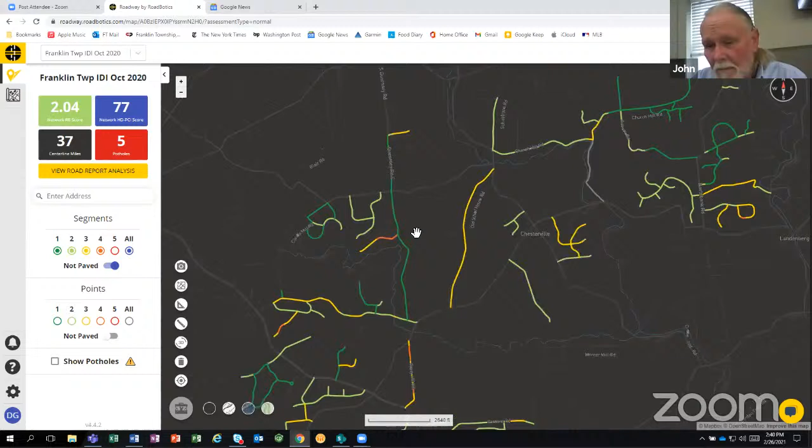So John, I'm showing right now on my screen the RoadBotics database. Do you want me to zoom in on anything? No, I'm going to pull up a spreadsheet next here if I get Jeff to let me display it.

Just for folks' edification, what John has done is downloaded everything into a database, into Excel. But within the RoadBotics framework, you can really drill down into some pretty specific roads. So for example, you get a pie chart of relative road quality.

Okay, is it displayed? Jeff, are you going to share? Do you want me to stop sharing that screen? I want to point a few things out here. Yep, there you go, I just stopped sharing. Is that displayed now, John? Do you see a spreadsheet? Yeah. I made you a co-host.

It's displayed on my computer right now. Yeah, I know, are you having a computer issue? Oh, yes.

Jeff's got to do something, but I think what's important is the range of road condition within the yellow. It's a wide range, and at the bottom of the yellow it's only 2.5 - something we'd only have a passing interest in. But when it gets over 3, then I think we've got something to look at.

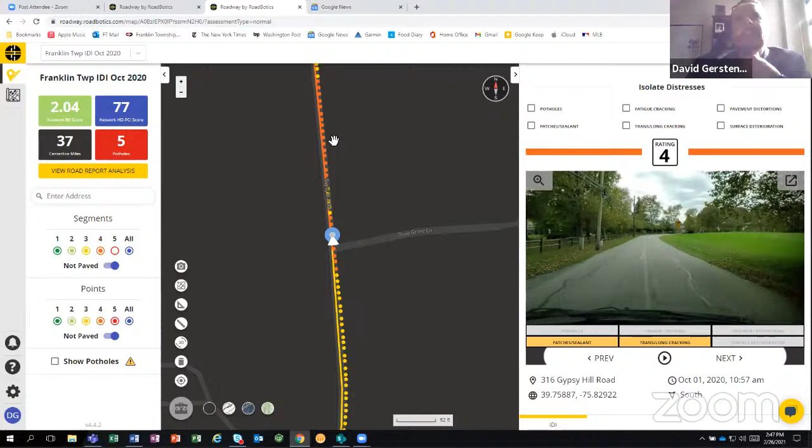Alligator cracking. Yeah, it's an incredibly useful tool. The only thing is it's limited, it just indicates the visual look of the surface, which is important because it points you to the issues.

So I think this further validates things. When you and I and Jeff went out on that excursion in January, you and Jeff were pretty innovative, using a cell phone and an iPad to display the RoadBotics database. And as we drove around, what we saw in the roadways was pretty much validated by what was in the RoadBotics display.

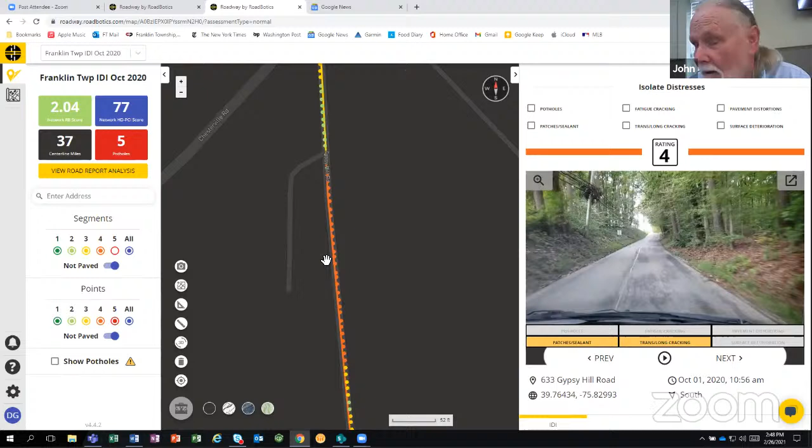And I think that's what's great about it, this visual tool. You can look at this segment and say, yeah, you're right, there's surface cracking, but you're also seeing some indentation, so it's pretty valuable, I think. And it was definitely worthwhile.

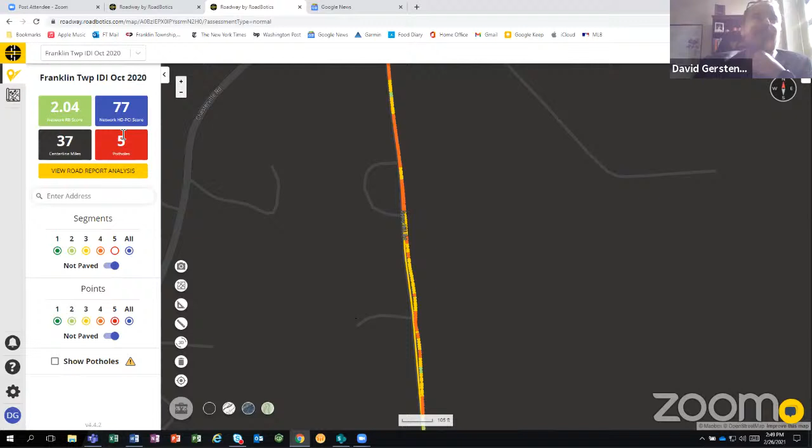And it all dumps, as John said, into a nice spreadsheet that analyzes the percent of cracking and percent deterioration, so you can really dig into the numbers. It'll actually alert you to potholes, if it sees a pothole it'll tell you, you got 5 potholes. And then the report's great, all downloadable into Excel.

So at some point, probably not next year or the year after, but probably every 4 or 5 years, it's probably a useful exercise to keep revisiting this.

Just so we can see, not year over year, but every 3 or 4 years, is the road system getting better? Are we accomplishing our goal?

David, there's one other comment. It's a tool I was using the last few days that would be very useful to any of us if you can get it installed and working. I was using Google Earth. Franklin Township has a set of overlays in Google Earth which overlay all the property lines of the township, and you can click on the property to get information about it. What was incredibly useful is that you could copy the coordinates out of a cell in a spreadsheet or database and paste it into Google Earth, and it would display that exact spot. So you could very quickly find out each segment they defined, where it was, by pasting it in there.

I did send you the overlays. So if you install Google Earth and then install those overlays, you would find that to be a very useful tool. Yeah, I think I saw that post, you sent me something earlier today. It's very interesting. If you have trouble, John can step you through how to get those overlays into Google Earth. It's pretty easy—you collect them as a mass and drop them into the My Places box or something. Anyway, that's a useful tool for any of us if you want to really find a spot on the map that's in the RoadBotics database.